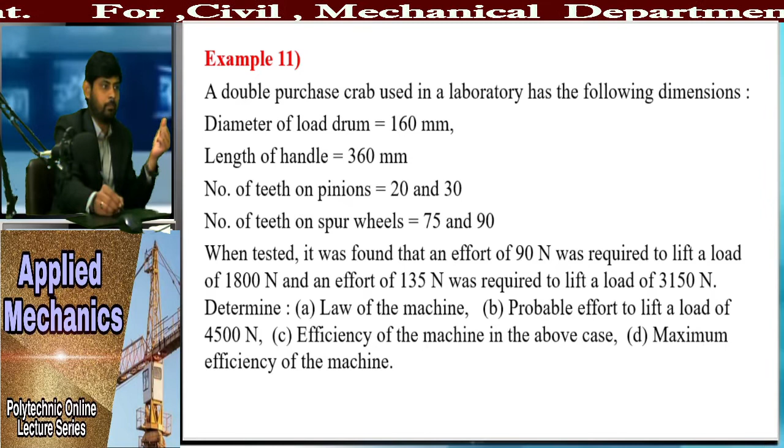A double purchase crab. Here the problem directly mentions double purchase crab, meaning we need to use the formulas for double purchase crab. Used in a laboratory has the following dimensions.

Various dimensions are given to us: diameter of the load drum 160, length of the handle 360 mm, number of teeth on pinions 20 and 30, number of teeth on the spur wheels 75 and 90.

When tested, it was found that an effort of 90 Newton was required to lift a load of 1800 Newton, and an effort of 135 Newton was required to lift a load of 3150 Newton.

Determine: one, law of machine; two, probable effort to lift a load of 4500 Newton; three, efficiency of the machine in the above case; and four, maximum efficiency of the machine.

So here we have to find out four terms. So first thing you have to do is write down the given data.

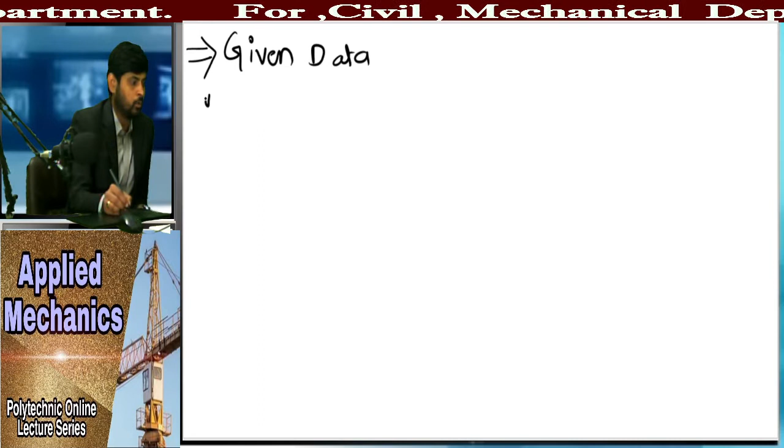Given data: first, diameter of the load drum. We are given d, but in our formula we use radius. So you can write here radius of the load drum, and diameter of load drum, that is d is equal to 160 mm.

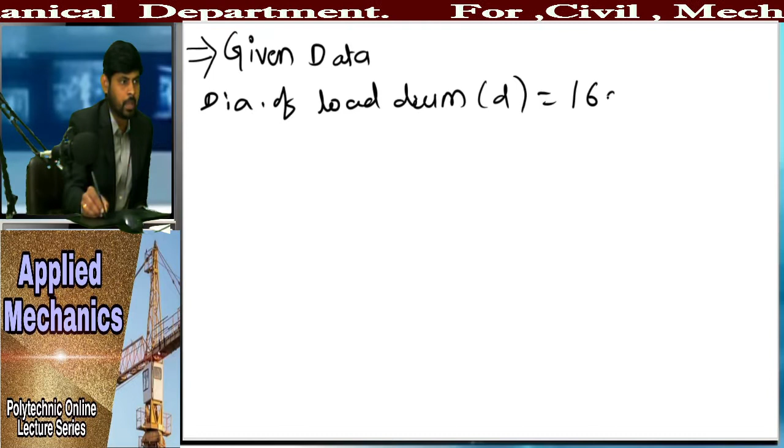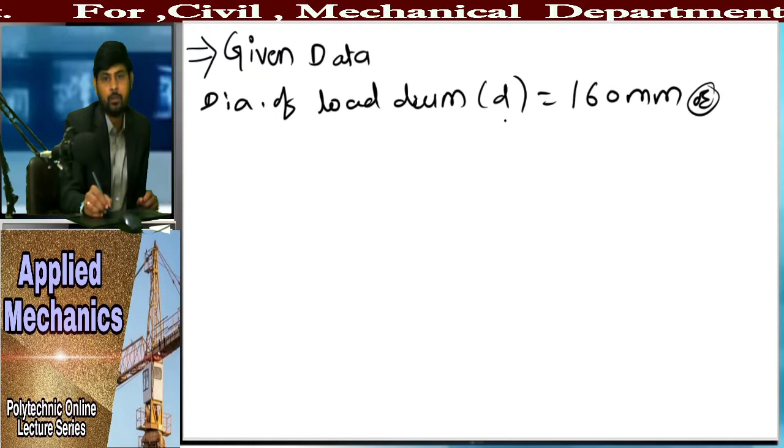Or we can convert this diameter into radius by dividing the diameter by 2. So here you can write radius of load drum, that is r is equal to 80 mm.

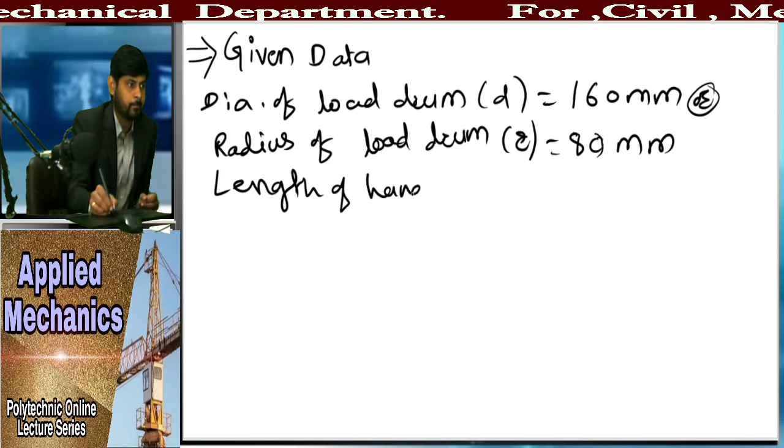After that, the second thing we have given is the length of the handle, directly given to us. So length of handle, L is equal to 360 mm.

Again we have given number of teeth on pinion: 20 and 30. So write down number of teeth on pinion, T2 is equal to 20, and T4 is equal to 30.

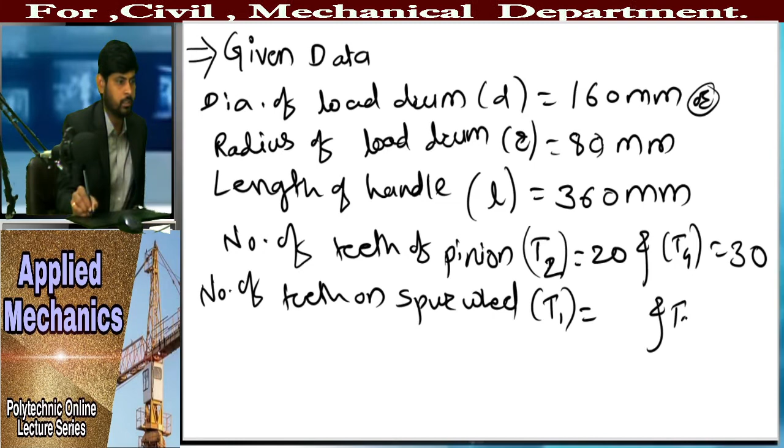After that, we have given number of teeth on spur wheels. So you can write number of teeth on spur wheel, T1 is equal to 75 and T3 is equal to 90.

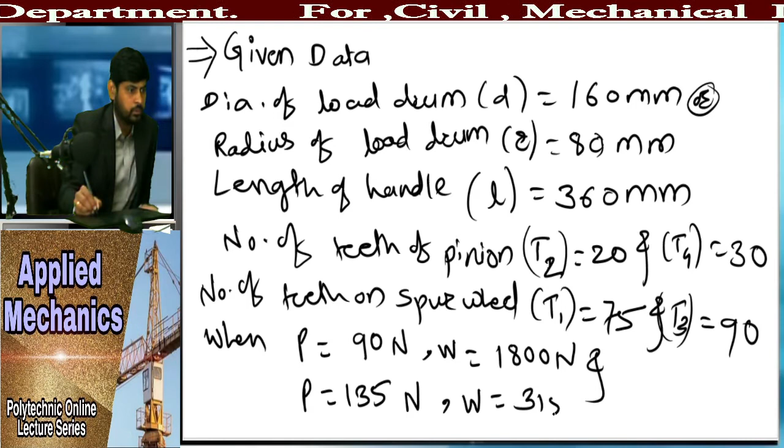So we have calculated all that. Now we have given here two loads and two efforts, so that is also given data. When P is equal to 90 Newton, at that time W is equal to 1800 Newton, and when P is equal to 135 Newton, at that time W is equal to 3150 Newton.

Now they have asked about the first part, A, law of machine. So we have to find out the relation of law of machine.

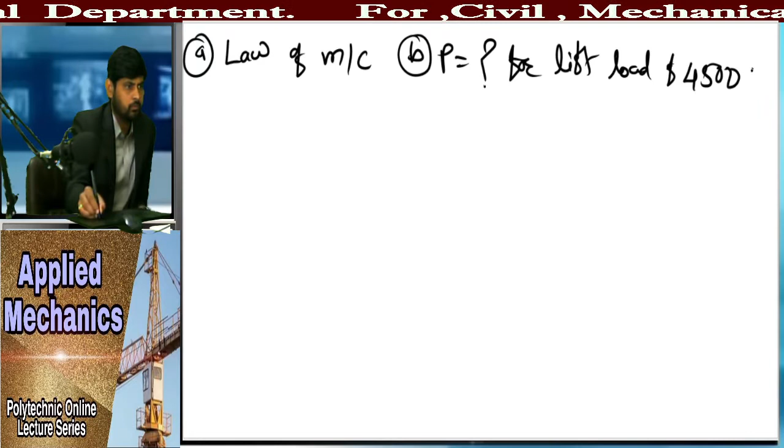Second thing, B is nothing but the effort, what is the probable effort to lift the load, right? So here effort is how much for lift load of 4500 Newton.

C, what is C? Efficiency of the machine in the above case. So here efficiency is equal to how much, right? After that, maximum efficiency of the machine. So here D, eta max is equal to how much? So we have to find out these four terms.

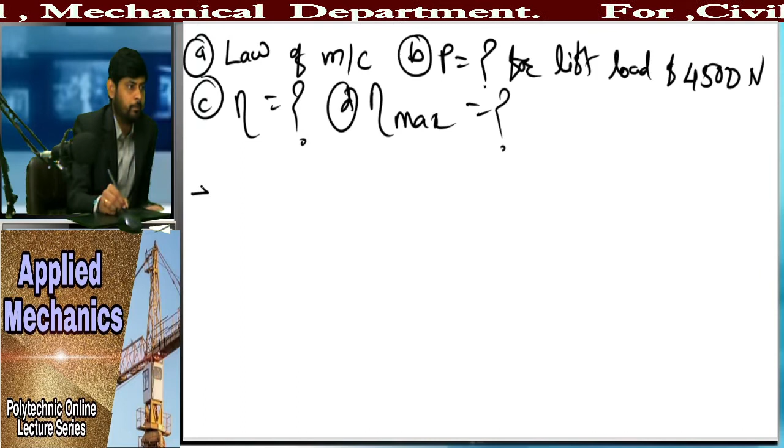Now law of machine. First thing, law of machine. So we know very well the law of machine equation, right? Law of machine equation. So what is it? It is P is equal to mW plus C, right? So this is our equation number 1.

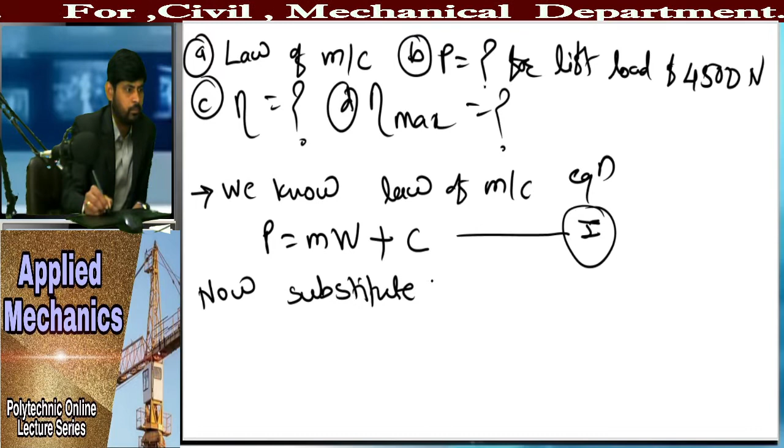Now we know the value of P and value of W, but we have two values of P and two values of W. Now take that value. So here now substitute the values of P and W in equation 1. In this equation we need to put both values of P and both values of W. So you will get the equation like this.

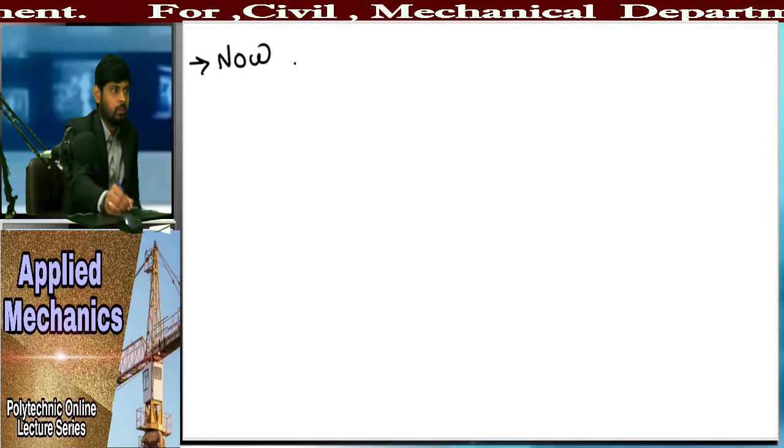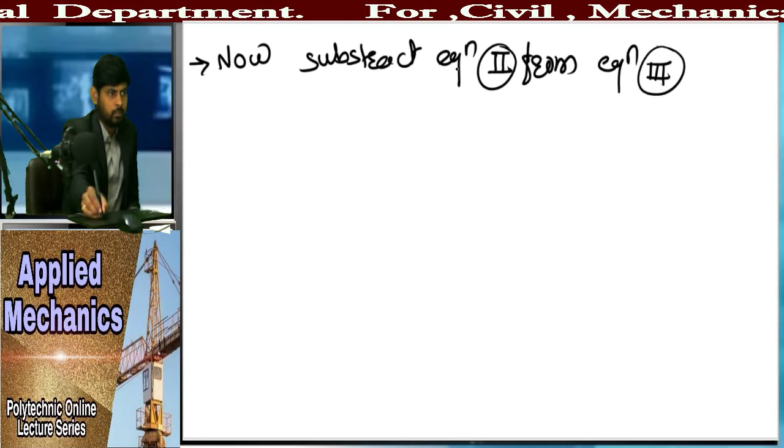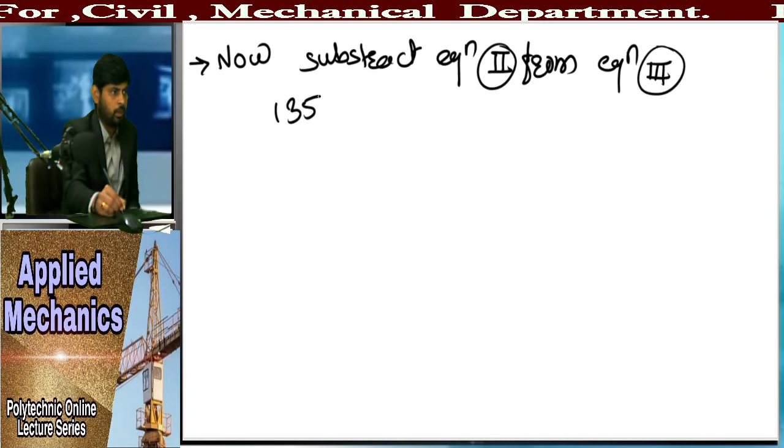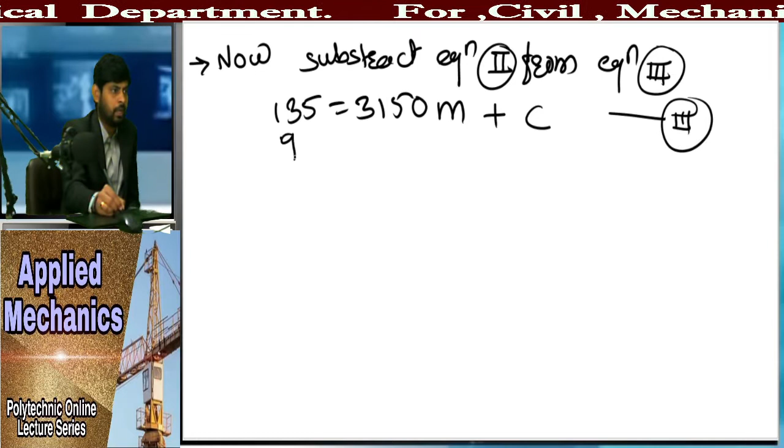Now subtract equation number 2 from equation number 3. So here your equation number 3 is 135 is equal to 3150 m plus c. This is your equation 3. And equation 2 is 90 is equal to 1800 m plus c. This is your equation 2. Now subtract this equation from equation 3. So here minus, here minus, here minus.

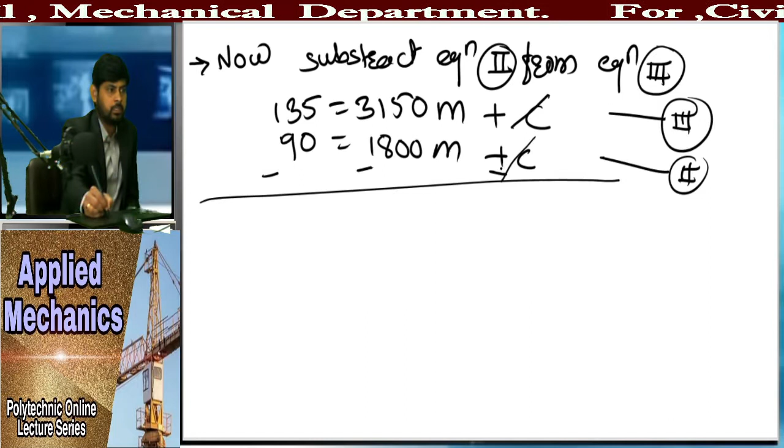Now here you can see plus c minus c will get cancelled. 135 minus 90, that is nothing but 45, is equal to, right, 3150 minus 1800. So you will get the equation like this: 45 is equal to 1350 m.

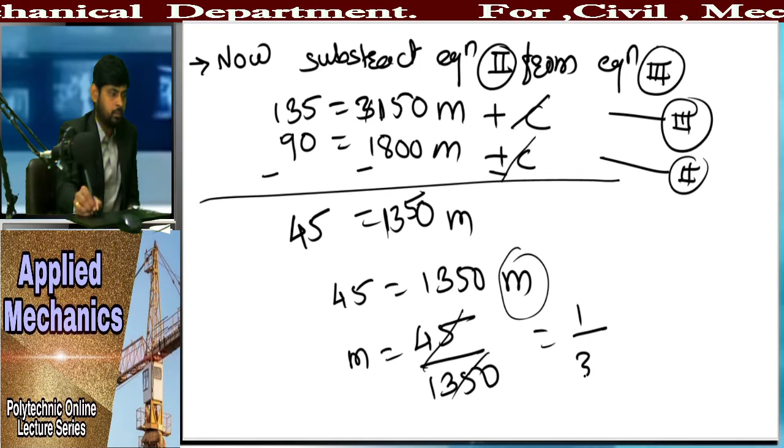So now you can find out the value of m, right? So here m is equal to 45 divided by 1350. Now do this calculation. This will be nothing but 1 by 30. So this is the value of m, that is nothing but 1 by 30.

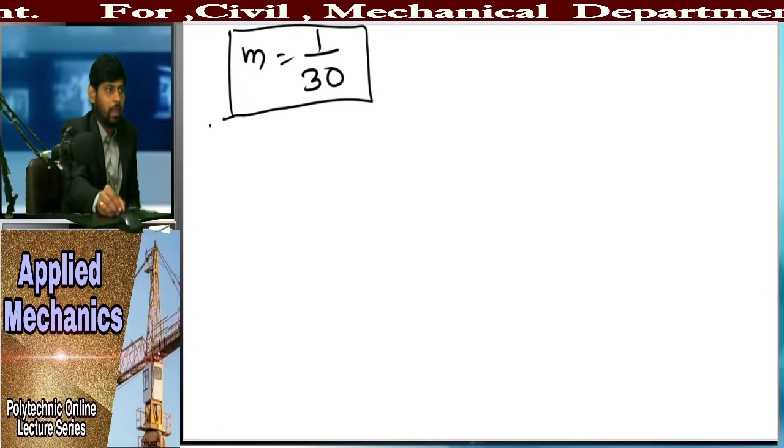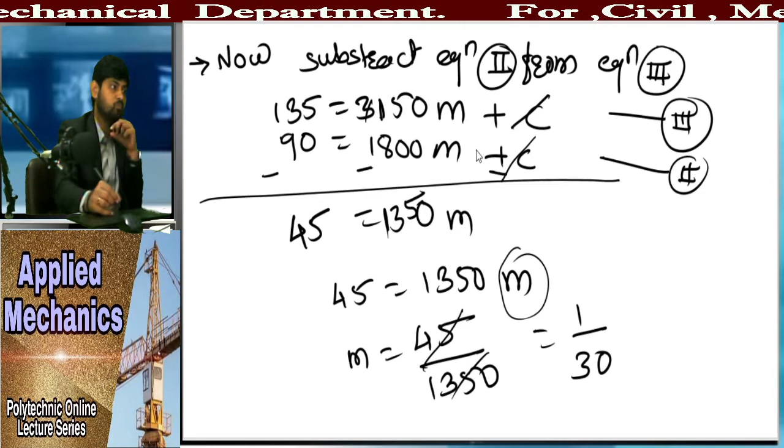Now once we get the value of m, we can find out the value of c by using the value of m in equation 3 or 2. So now substitute the value of m in equation 2, whichever you want - you can put it in equation 2 or equation 3.

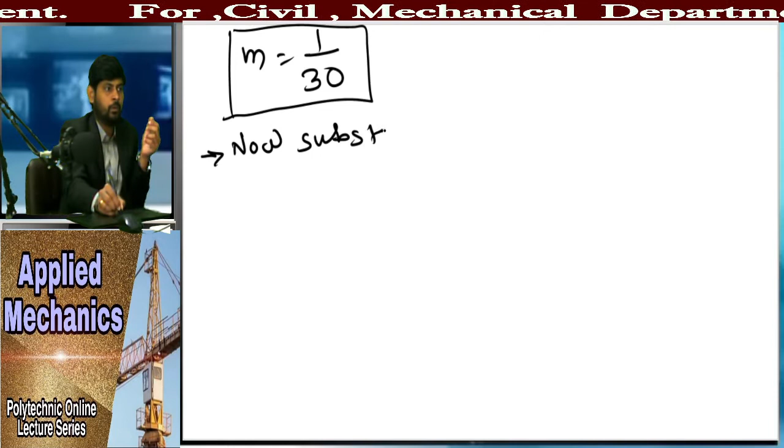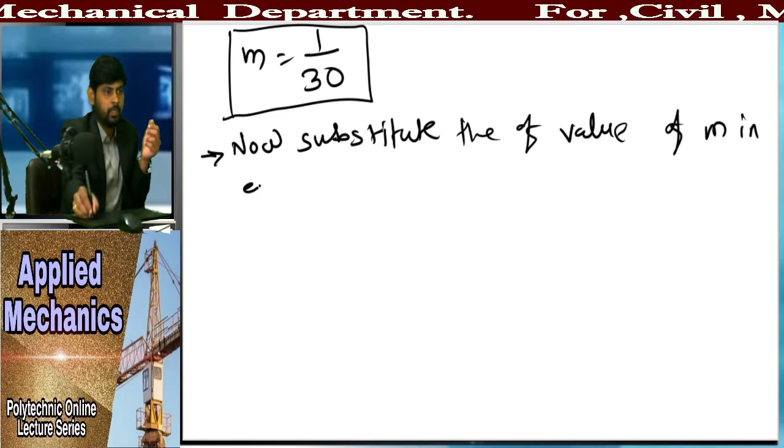Now here we can write, now substitute the value of m in equation 2. So what is equation 2? That is nothing but 90 is equal to 1800 m plus c. Now 90 is equal to 1800 multiplied by 1 by 30 plus c. So here the zeros will get cancelled. So this is the 60, right? So you will get the equation like this: 90 is equal to 60 plus c.

So this 60 goes to the left side. Here it is plus, and on the left side it will become minus. So 90 minus 60 is equal to c, right? So the value of c is nothing but 30.

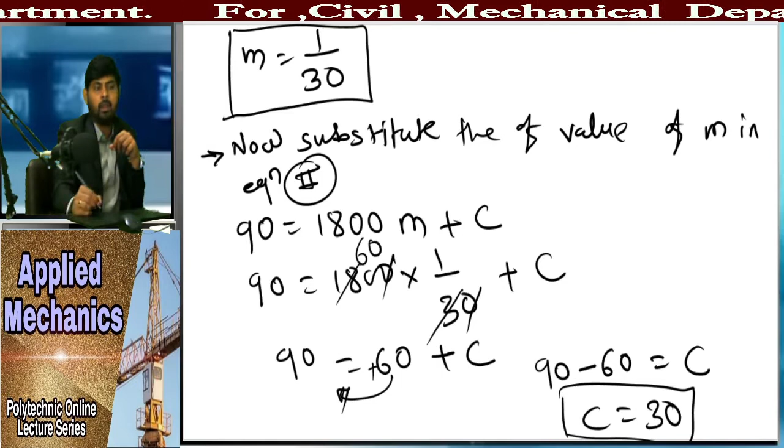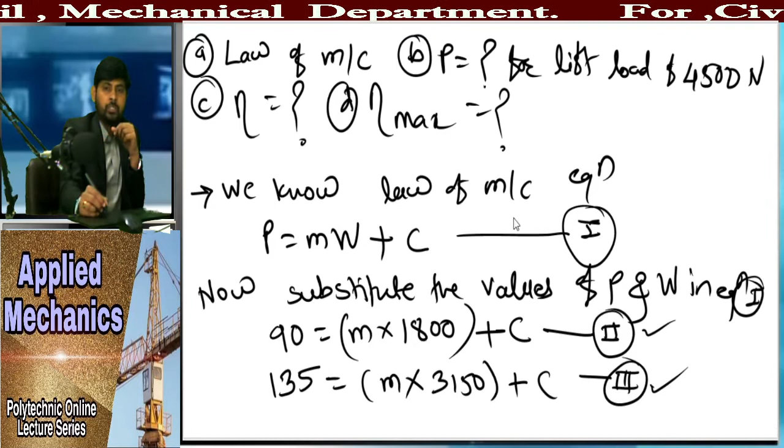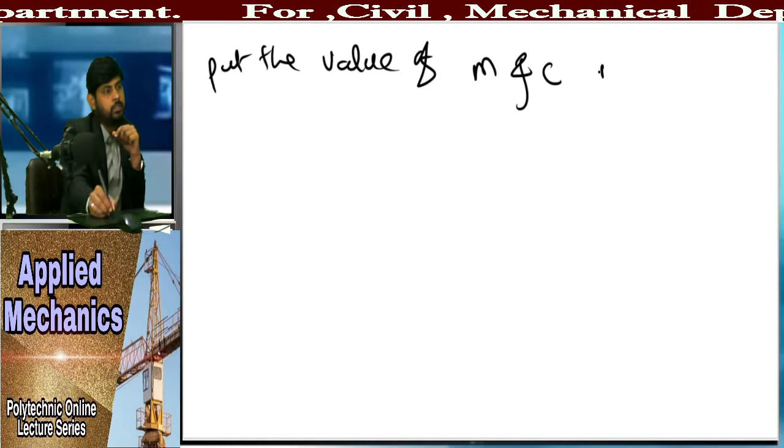So now you get the value of m and you get the value of c. So both values you can put in equation number 1 here. Then you will get the law of machine relation or equation. So now put the value of m and c in equation number 1, right? So our equation number 1 is P equal to mW plus c.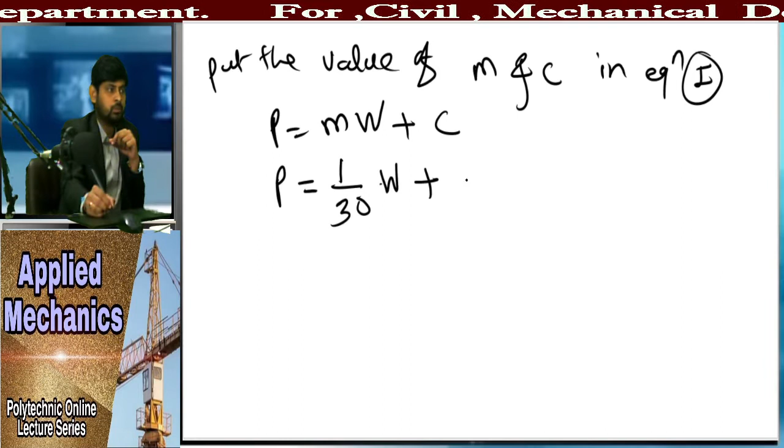So here value of P we don't know right now. Value of m we know, that is nothing but 1 by 30. W we don't know right now. So value of c is 30, right?

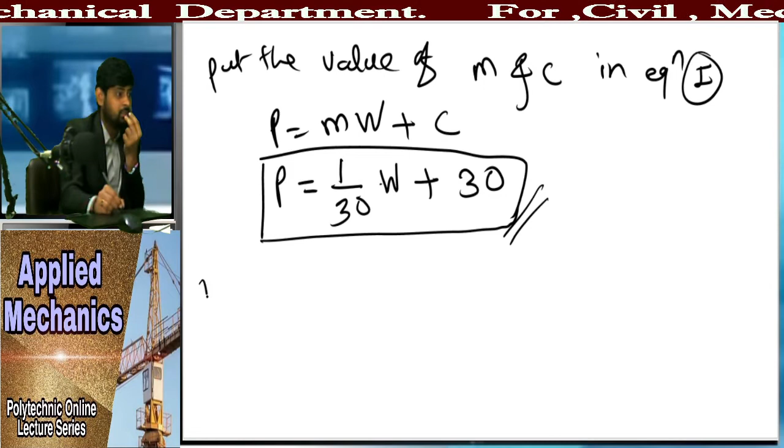So this is the equation for law of machine that we have to find out. This is our first term which we have calculated. Now what it asked us, second term, that is b. What it said is effort is how much when load is 4500. So how we can find out?

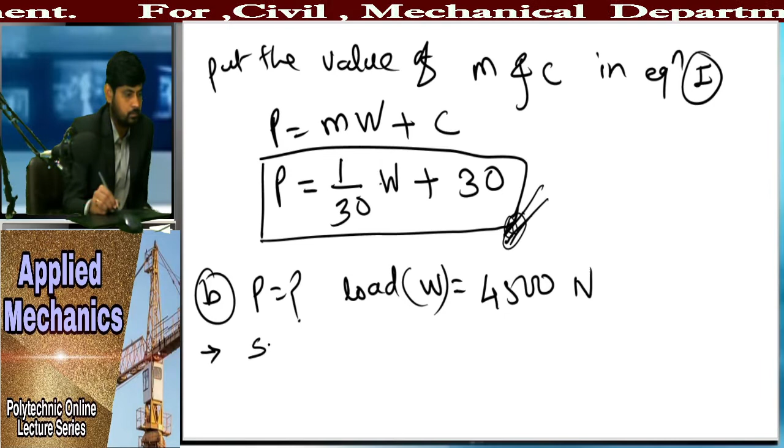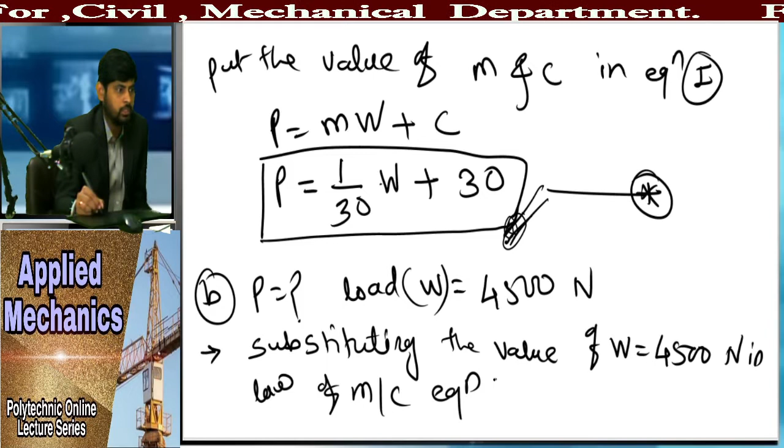Now we just have to find out the value using the law of machine equation. In this equation we have to put the value of W and you will get the effort. So substituting the value of W, that is nothing but 4500 Newton, in the law of machine equation, which we have given the name equation star. So we have to put the value of W in this equation. Now write out that equation: P is equal to 1 by 30 multiplied by the value of W, that is 4500.

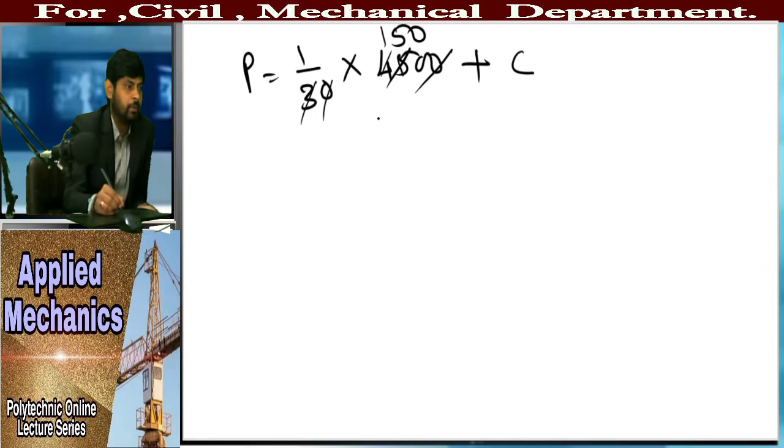Plus C. Now do the calculation of it. You can see here, 0 0 will get cancelled. Then 3 1s are 3, 1, 3 5s are 15. So it will be 150. So here you can see P is equal to 150 plus the value of C, which is nothing but 30. So P is nothing but 150 plus 30, that is 180 Newton.

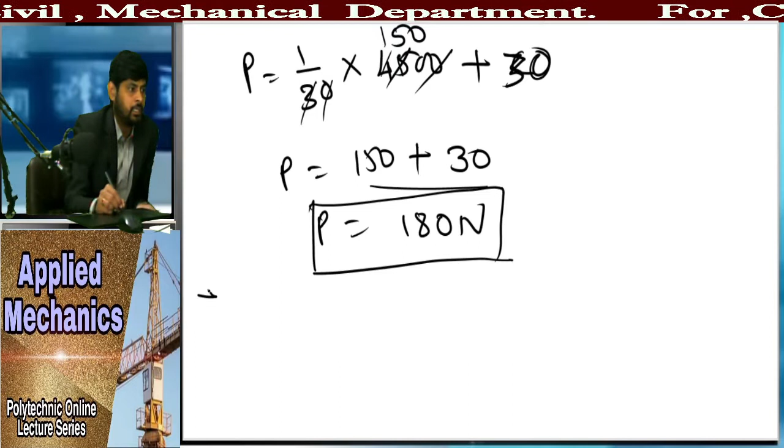So we have calculated the value of effort required to lift the load. So you can write a sentence: 180 Newton effort required to lift load of how much? 4500 Newton.

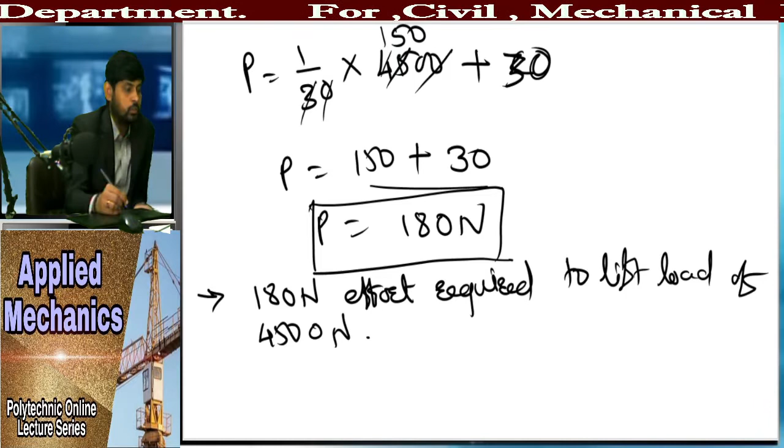Now the third thing we have to find out is efficiency for the above cases, meaning we have to find out the efficiency for both the cases. So we have to find out the efficiency of the machine in the above case, meaning for this case we have to find out the efficiency.

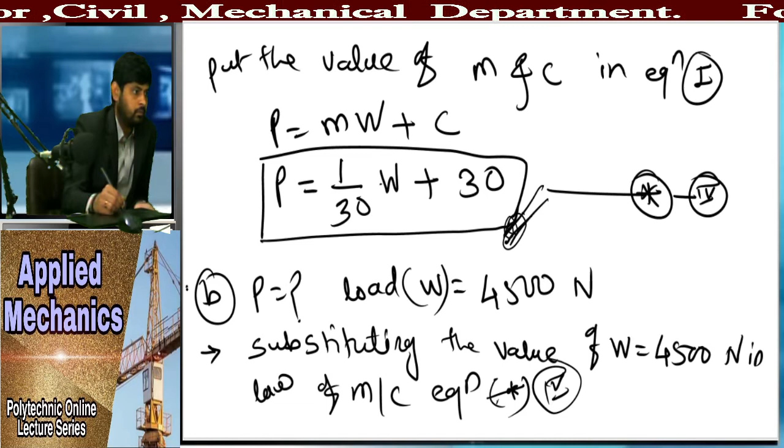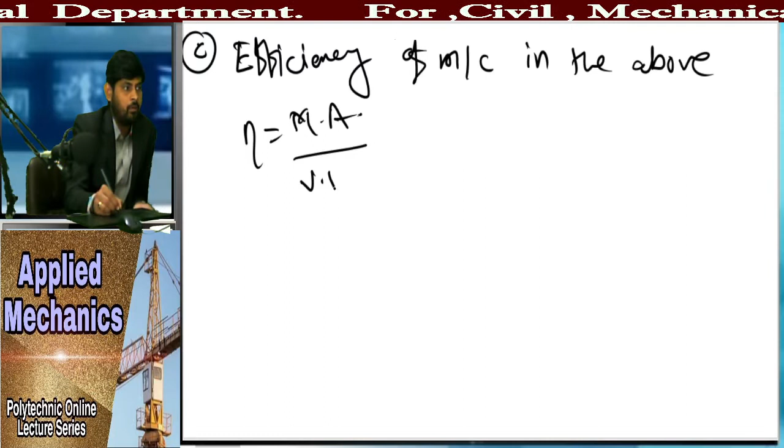So here for efficiency we have a formula: mechanical advantage divided by velocity ratio into 100. So efficiency is nothing but mechanical advantage divided by velocity ratio into 100. But velocity ratio we don't know, and mechanical advantage we don't know.

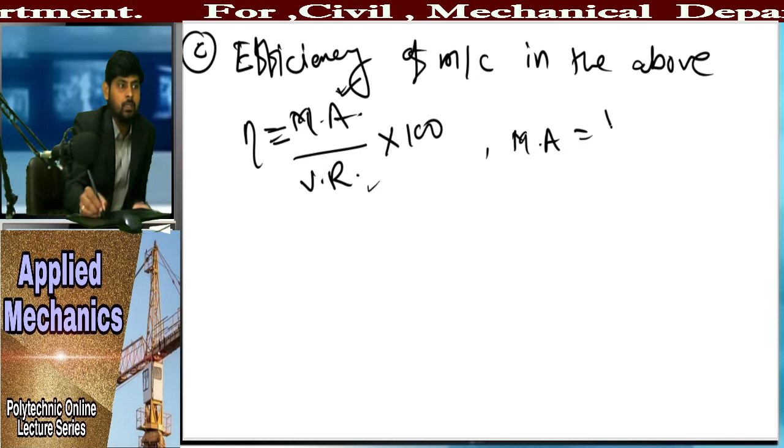So mechanical advantage we can find by using the equation: W upon P. W we know, that is nothing but 4500. The value of P we know, that is 180. So you can find out the mechanical advantage. Do that thing: mechanical advantage is equal to, 0 0 will get cancelled, so 450 divided by 18 is nothing but 25. So the value of mechanical advantage is 25.

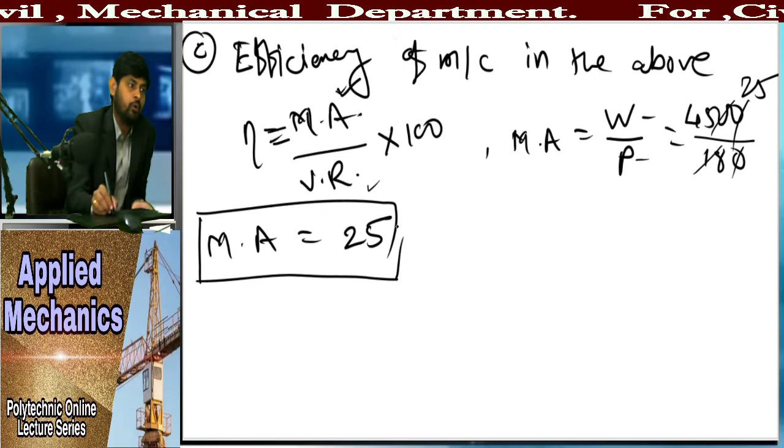Now the second thing you have to do is find out the velocity ratio. So we know that velocity ratio for a double purchase crab winch is nothing but: velocity ratio is equal to L upon R multiplied by T1 by T2 multiplied by T3 by T4. So this is the formula for velocity ratio.

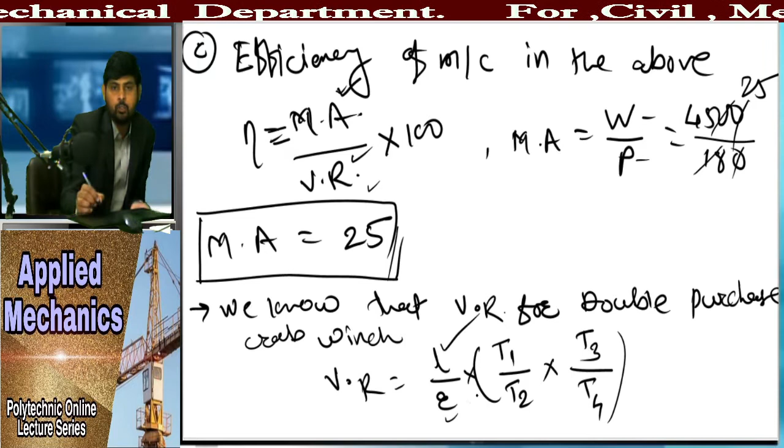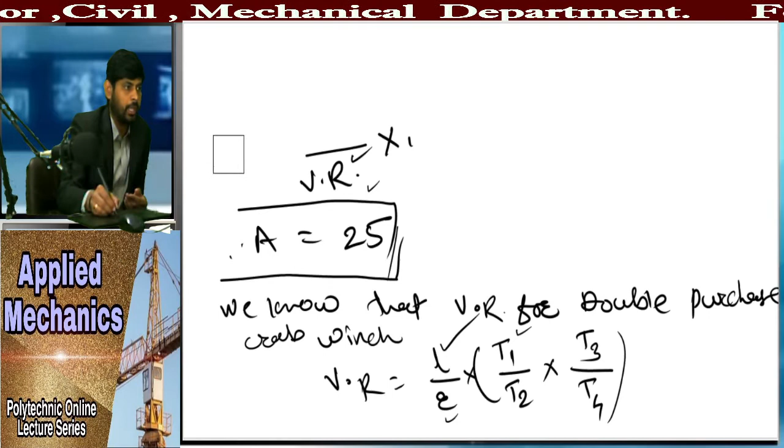Now we know the value of length of handle, we know the value of radius of load drum, we know the value of T1, T2, T3 and T4. Put all these values in this equation and find out the velocity ratio. So how we can find it out? Just wait a minute. Now we have to find out the value of velocity ratio by using the formula L by R multiplied by T1 by T2 multiplied by T3 by T4.

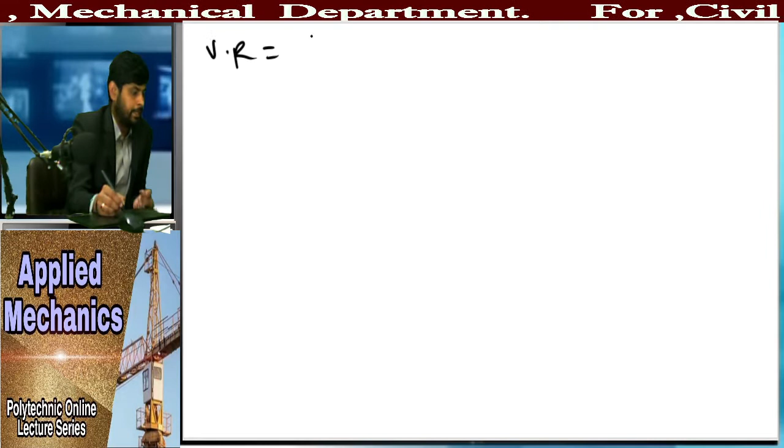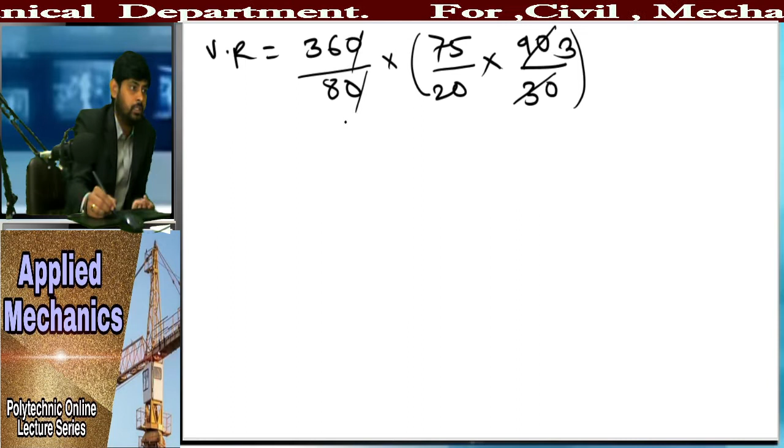So here, velocity ratio is equal to the value of L by R, multiplied by T1 by T2 multiplied by T3 by T4. Value of L is 360, value of R is 80, value of T1 is 75, value of T2 is 20, value of T3 is 90, and value of T4 is 30. So do this calculation in your calculator. I hope all of you can operate the calculator.

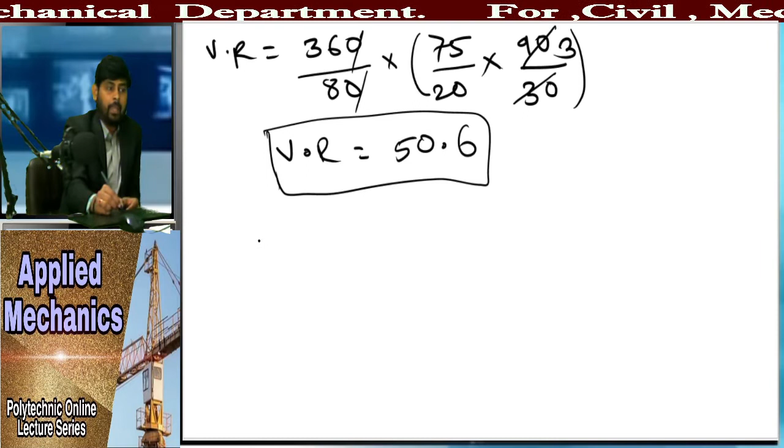Then you can easily find out the value of efficiency using the formula: efficiency equals mechanical advantage divided by velocity ratio into 100. Now put the value of both here. Efficiency is equal to mechanical advantage 25, velocity ratio 50.6, multiplied by 100. Do this calculation in your calculator, 25 divided by 50.

So see here, just wait a minute.

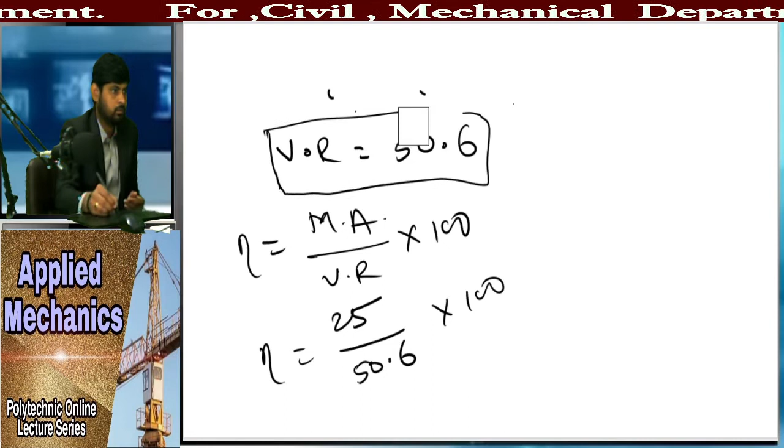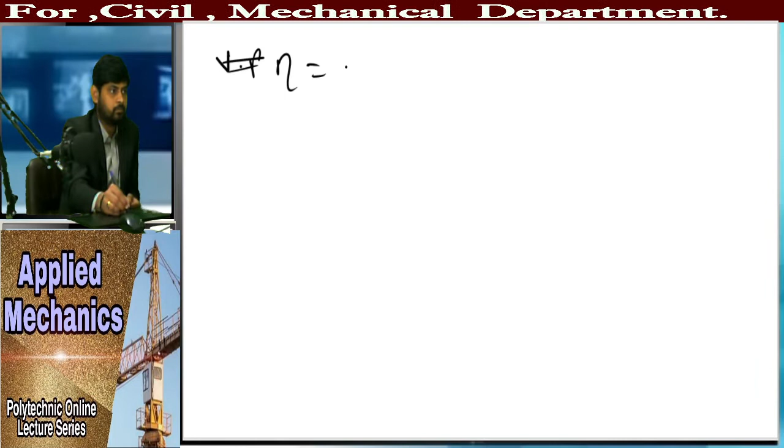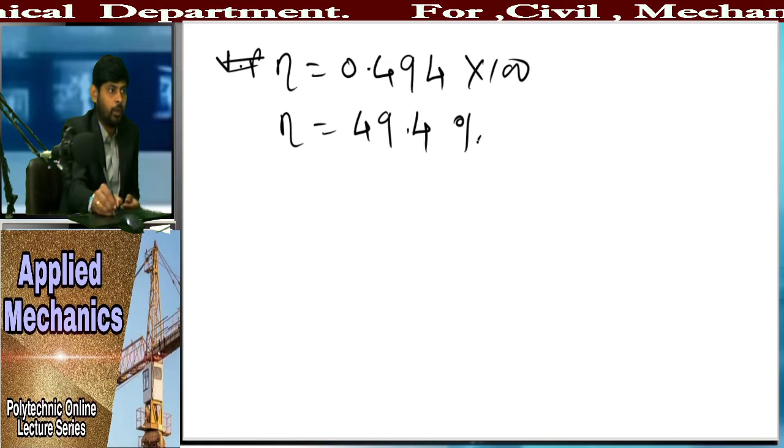See here, the formula we have: efficiency equals mechanical advantage divided by velocity ratio. Value of mechanical advantage is 25, value of velocity ratio is 50.6, multiplied by 100. Now do the calculation: 25 divided by 50.6, efficiency equals 0.494 multiplied by 100. Efficiency is 49.4%. So this is your efficiency. So the third term we have calculated here, the actual efficiency.

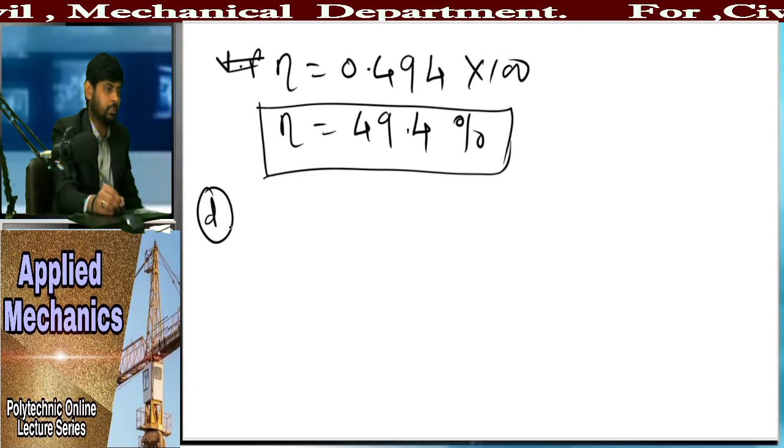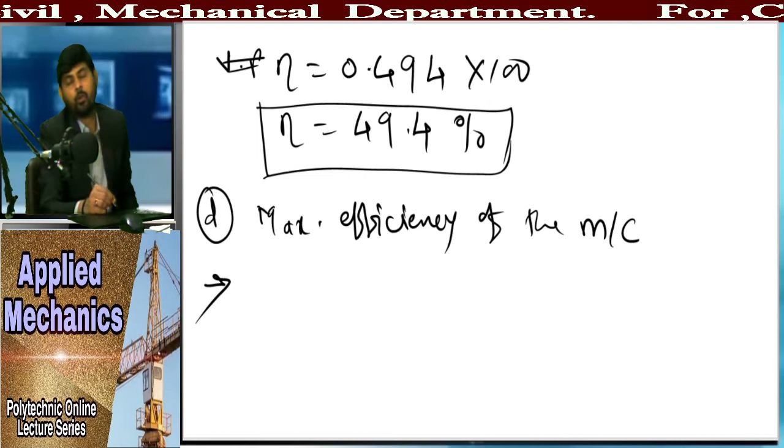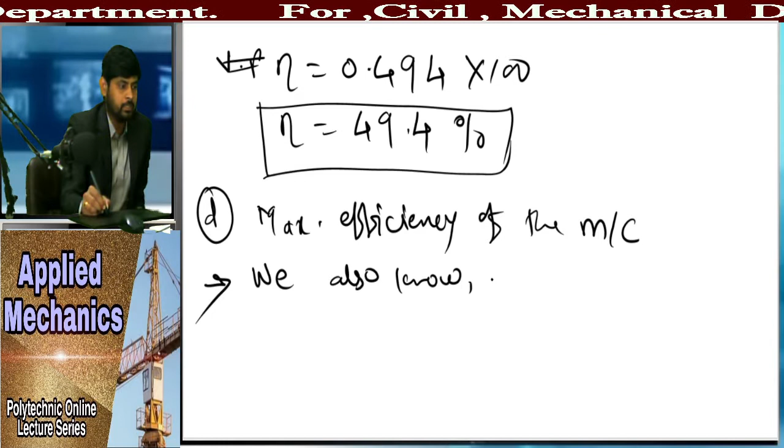Now the last thing we have to find out is the maximum efficiency. So you can write maximum efficiency of the machine. We know the formula for this, we have already discussed it. Maximum efficiency of the machine, η max or efficiency max, is equal to 1 upon m into velocity ratio.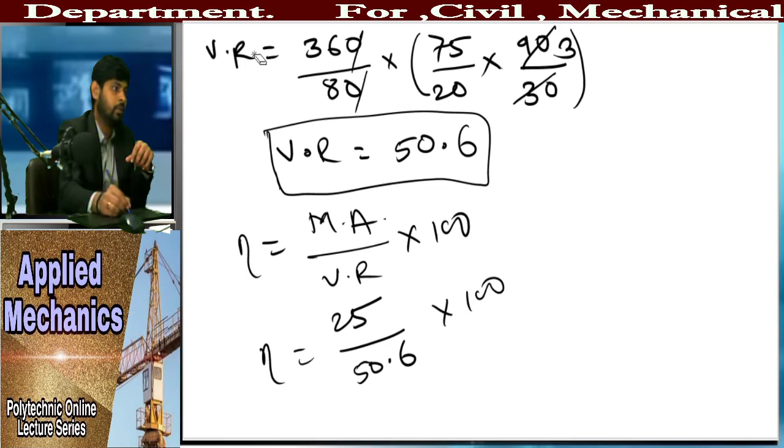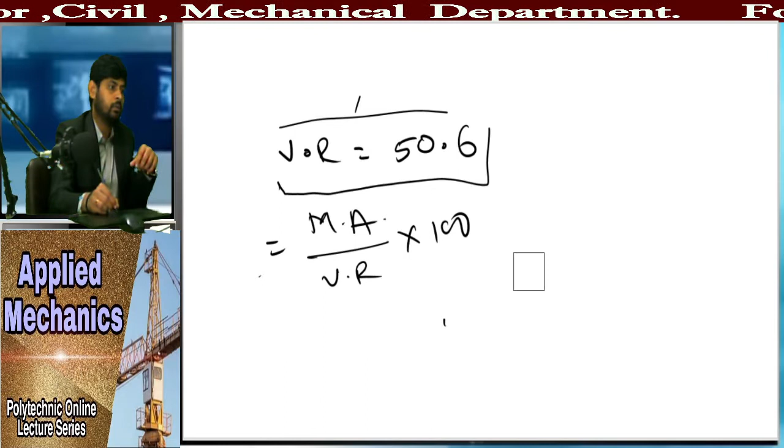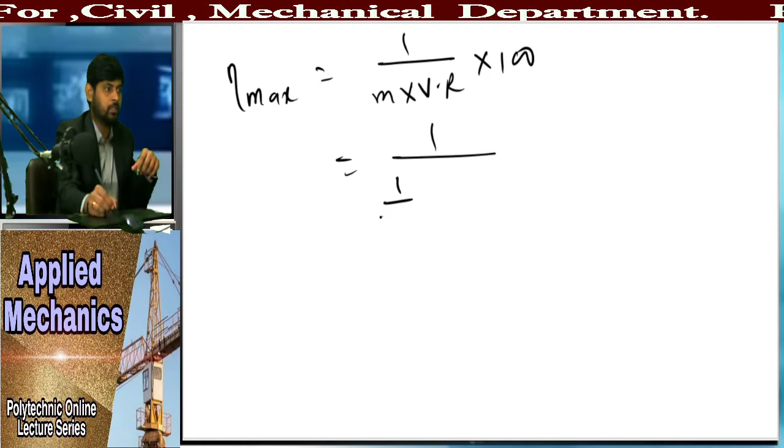So here you can see, η max is equal to 1 upon m into VR into 100. Value of m is 1 upon 30, and value of velocity ratio is 50.6, multiplied by 100. Now see here, after calculating this term you will get, so do this calculation in your calculator, or you can write this term like this.

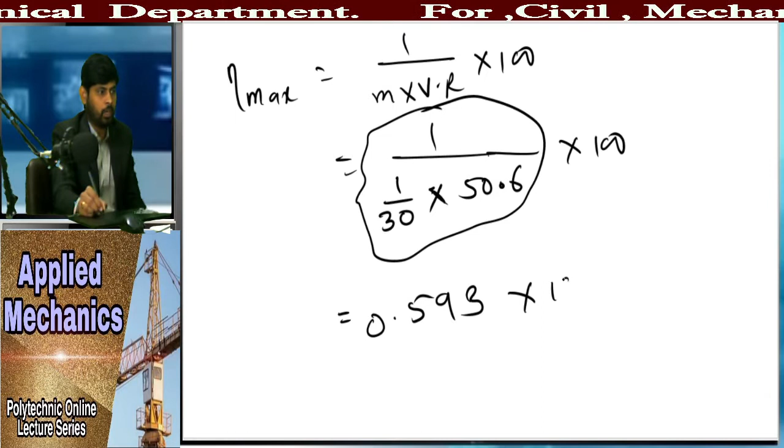This whole calculation comes to 0.593. You have to do this calculation in your calculator multiplied by 100. Now see here, again do the calculation: 0.593 into 100, that will be 59.3%. So maximum efficiency is 59.3%. So here is the fourth answer.

So here our problem is complete. Now we are going to discuss the simple screw jack. Till now we have discussed 5 machines. Total we have 8 simple lifting machines: simple wheel and axle, double wheel and axle, worm and worm wheel, single purchase crab winch, double purchase crab winch, and now we are going to discuss the sixth machine, the simple screw jack. So here you can see what simple screw jack is.

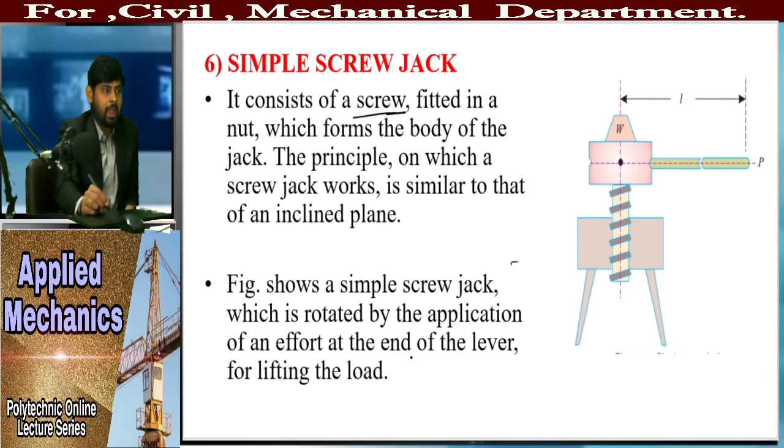at the end of the lever for lifting the load. हा जो स्क्रू आहे, हा जो बोल्ट आहे, त्याचे नट दिलेले आहे. इथून याला आतून थ्रेड्स असतात.

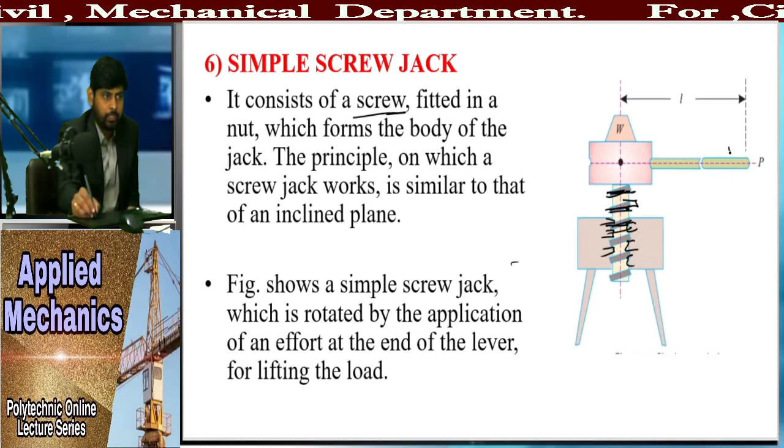Here you can see this machine also has the inside internal thread, and this has an outside thread. So when we are applying the effort here on this handle, म्हणजे जसं आपण हे रोटेट करतो, तर हे स्क्रू एक तर इन्सर्ट होतात आतमध्ये जातात, अदरवाइज वरती शिफ्ट होते. Depends in which direction we are applying the effort.

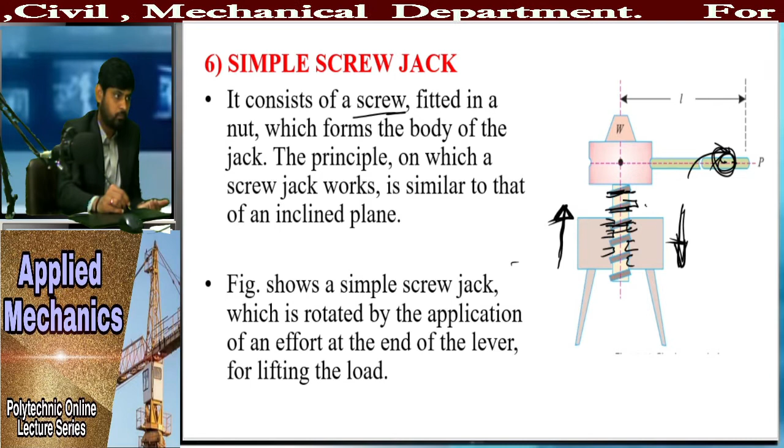ठीक आहे. सो जेव्हा आपल्याला तुमची कार लिफ्ट करायची असते, तर you have to move the direction in anti-clockwise. सो दिस स्क्रू विल गेट द अपसाइड. वरती गेल्यानंतर आपण टायर बाहेर काढतो आणि परत क्लॉकवाइज डायरेक्शनला फिरून टायर लावल्यानंतर जागेवरती सोडतो. So we have to apply the load on this handle.

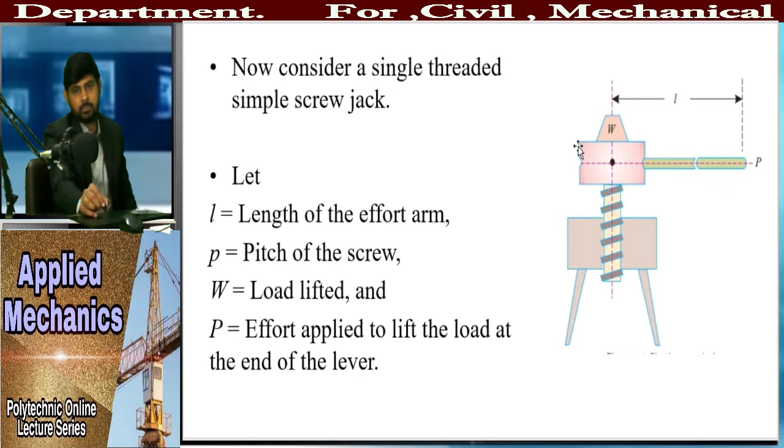After that, now consider a single threaded simple screw jack. So this is the single threaded screw jack. Let's see some terms for this.

So L is nothing but the length of effort arm. So here this is L, the length of effort arm, म्हणजे जे पण effort आपण अप्लाय करतोय त्याची length from the center.

After that, P is nothing but the pitch of the screw. W is nothing but the load which is lifted, and P is nothing but the effort applied to lift the load. So these are the terms used in a simple screw jack.

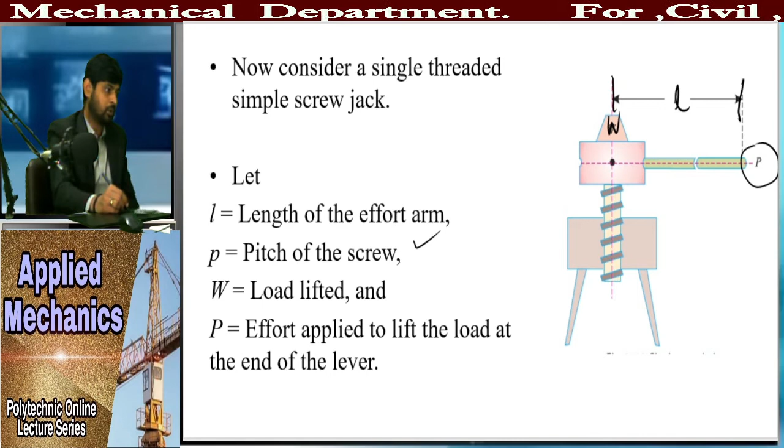So now see the relation of a simple screw jack. We know that distance moved by effort in one revolution of the screw is nothing but 2 pi L, which is similar to the double purchase crab winch and single purchase crab winch.

After that, distance moved by the load: one pitch is nothing but the distance moved by the load. So this P is nothing but our pitch.

Okay, so we can now find out the velocity ratio. We know the equation for that: it is the ratio of distance moved by the effort to the distance moved by the load. So distance moved by the effort is nothing but 2 pi L, and distance moved by the load is nothing but your pitch P.

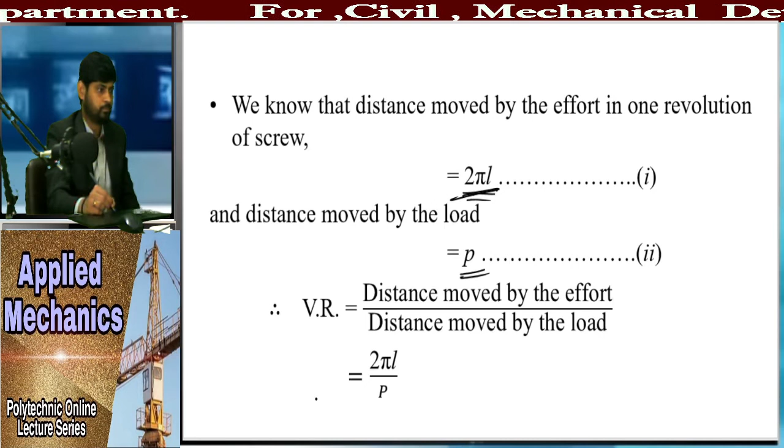Okay, so once you get the value, this is the value of velocity ratio for the simple screw jack.

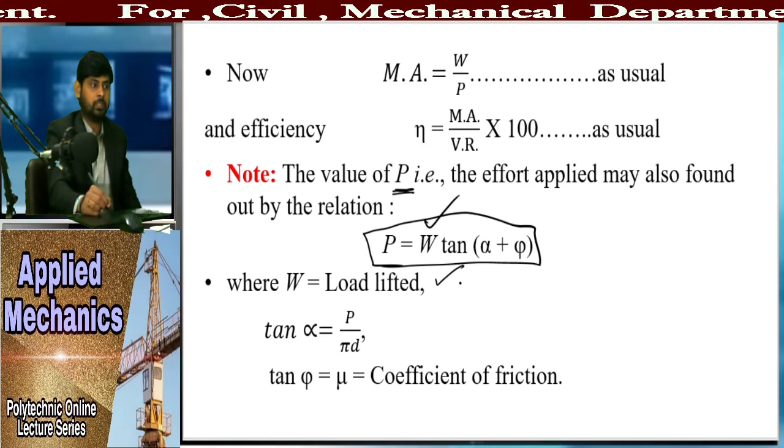Here W is nothing but the load lifted, tan alpha is nothing but P upon pi d, and tan phi is nothing but mu, that is coefficient of friction. So we can use this equation to find out the effort required.

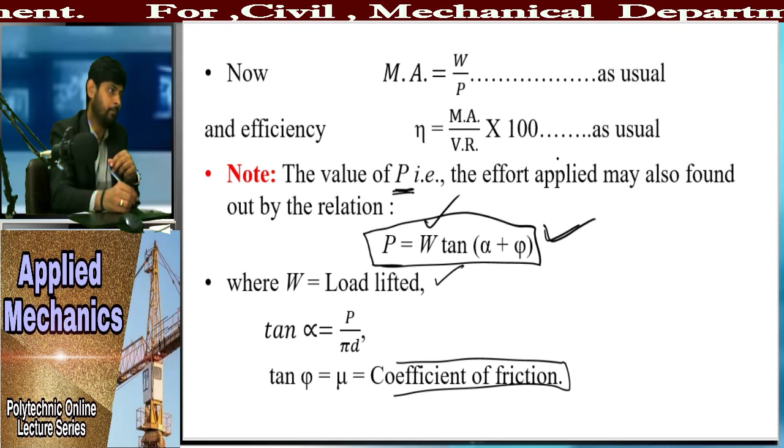As I told you, velocity ratio ची प्रत्येक टर्म for every machine ही वेगळी असते. So now we get the velocity ratio term for this, which is nothing but 2 pi L by P. So we have to apply this in the numericals.

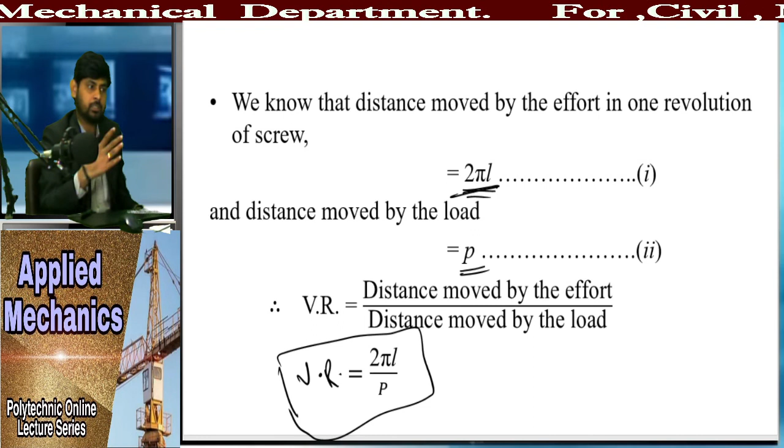So in the next lecture we will discuss the problems in a simple screw jack. Thank you.